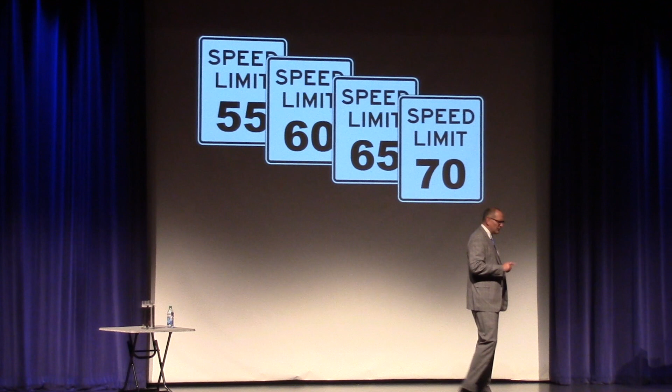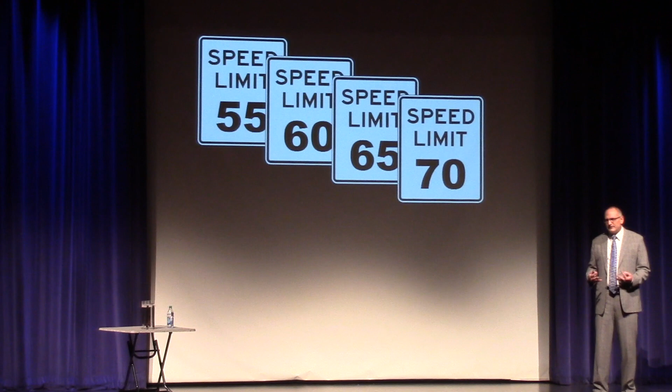Let's go back to our speed limit conversation. Speed limit's 55, or is it 60? Or is it 65? Or is it 70? Or in the Autobahn in Germany, there is no speed limit. Why? Why are these numbers those numbers in particular? Who set them, and why did they exist in the first place? It's a simple everyday example, but that premise, if you apply it throughout everything in your life, not just in engineering, and try to understand the whyness, it gives you basis to move on. So, let's get into some engineering examples and explore this notion of why.

So I'll offer this, that in the beginning, there was darkness. And God said, let there be light. And there was. And then at some point along the way, God inspired us to write something called the building code. Now the building code is littered with all kinds of regulations and rules and formulas and facts and limitations, and for good reason, right? We're trying to create safe, inhabitable places to be.

But when you start to peel back the layers of the building code and try to understand why are these things there? Where did they come from? What is their purpose and why are they there? It's very revealing. And in my career, there's been a couple of classic examples, which I'll share with you today, that aren't written in stone. They weren't passed down from the mountain by Moses.

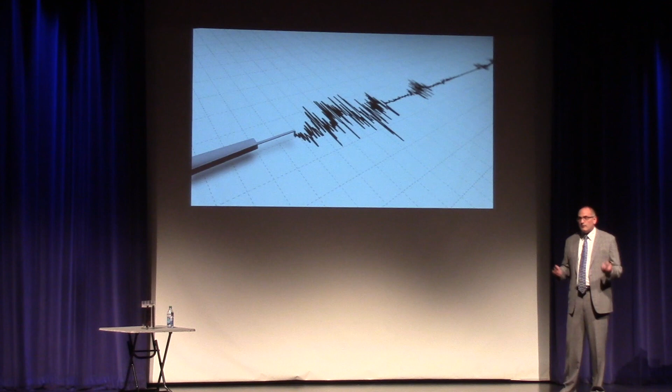What is its purpose? Before we talk about R, we have to think about what came before R. And before R, there was something called R sub W. And before R sub W, there was something called K. Where did all this come from? All right, so we got to go back in time. And back in time takes us to the 1940s and 1950s on the west coast of the United States, where our forefathers were starting to build the framework to do seismic engineering of buildings.

And so the framework and the philosophies embedded in the code today for seismic design started in the 1940s, or really got traction in the 1950s. That's where it started. This starts to help us understand what it is and why it is. What was happening in the 1950s? Of course, we didn't have computers to do calculations. We did calculations by hand. Well, we didn't, but our forefathers did. Hand calculations to describe and understand a very

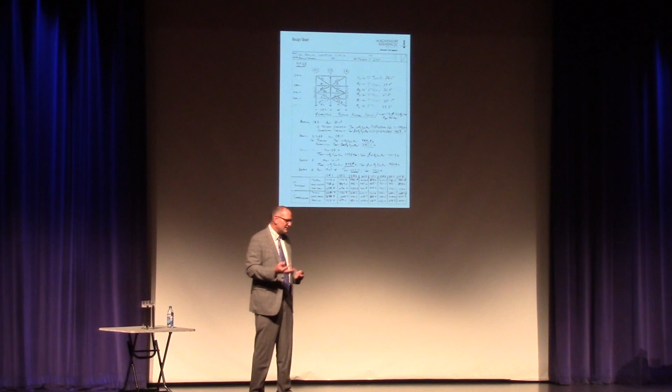challenging structural response. That is the idea of when an earthquake comes and hits a building and excites a building, the philosophy, the expectation is that the building will respond to that earthquake and concrete will crack, rebar will yield, steel will yield, and in doing so absorb that energy. It will respond non-linearly to that ground shaking. But in the 1940s and 1950s, there was no way to do those calculations in a practical sense.

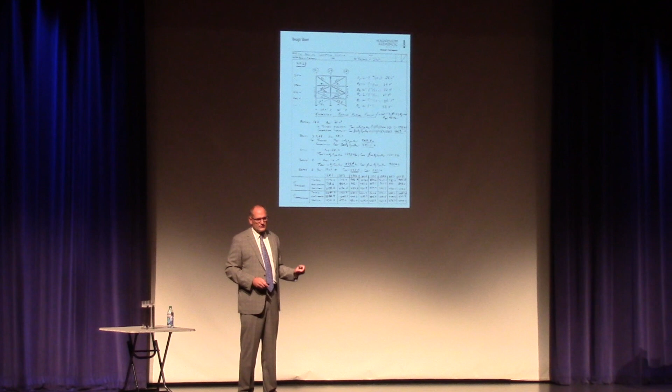So, what our forefathers dreamed up was, if we reduce that earthquake to a lower value, something that brings the demands down into the linear elastic range, so that we can actually do a calculation and come up with how much steel, how much concrete, how much rebar to put in the building, we have a chance. And then if we detail those connections and pieces properly and add ductility to them, they'll take up that gap,

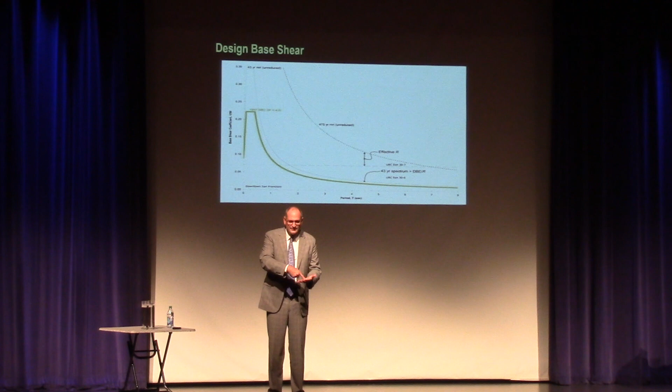But today, many engineers look in the building code and they think it came down the mountain from Moses and R equals 8. My God. All right, R equals 8. So what we've done, we've taken our earthquake and we've divided it by 8. 12% of the actual load that may exist when an earthquake comes. And we look at this and say, well, that applies to ductile systems. Things that will respond very ductilely, like moment frames, buckling restrained braces, things that will absorb a lot of energy. And so the code assigns this magical number 8.

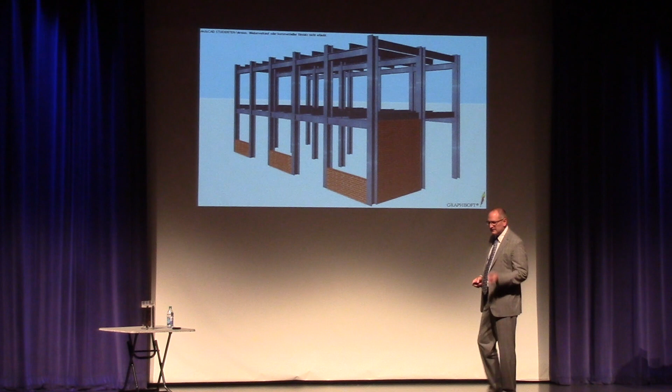What was being built at the time, from the 20s to the 50s, were a lot of masonry bearing wall buildings, and some buildings, as they were getting taller, included a steel frame. After earthquakes and earthquake reconnaissance, there was anecdotal evidence that buildings that included this steel frame did better than bearing wall buildings. Thus the requirement: anything taller than 13 stories must have one of these frames in it. Not based on science or math per se, but on field observation of earthquake damage. That seems rational at the time, nothing inappropriate.

But then we find out this in the 1961 code, and now we're into the Uniform Building Code. So now this has gone national, beyond the city of Los Angeles. Structural frame, buildings more than 13 stories or 160 feet. Well, wait a minute. Where did the 160 come from? I thought it was 150. It's a typo.

True story. So, the limitation of 160 feet for a reinforced concrete shear wall in the building code today is based on a shadow study and a typo. That's why it's there, not based on math or science. So today, when we're designing these very tall buildings, 1,000 feet or more, in places like San Francisco or Los Angeles, reflecting on the why of R and the why of 160 gives us two things. One is it gives us confidence to go a different way. We shouldn't be beholden to these rules that don't have any relevance to what we're trying to do anyways.

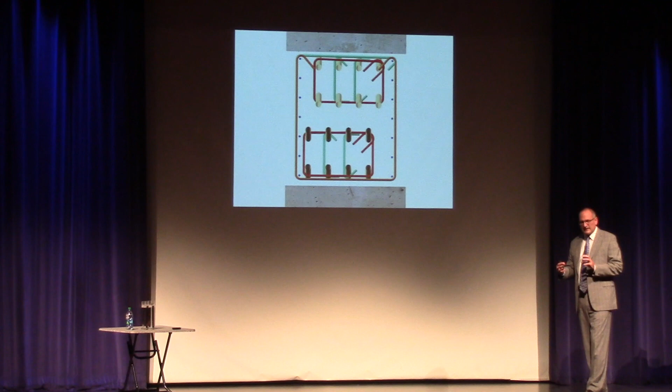Very heavily reinforced. The contractors complained there's these little micro cages that were required by the building code. Very, very difficult to put together, very time consuming. Cost a lot of time on the job site to try and stuff all this stuff together. So the question, why not? Why not do it differently? How might we do it differently?

Well, the idea was simple. Let's get rid of those little micro cages. Those are the things that are causing the problems and giving us alignment problems with the rebar. And let's just take the beam and simply enclose the beam with enough stirrups, enough ties to confine the beam and let the diagonal bars float free inside it. So it's easier for the contractor to place it, quicker for the contractor to place. This was the why not. Why not this? So what did we do?

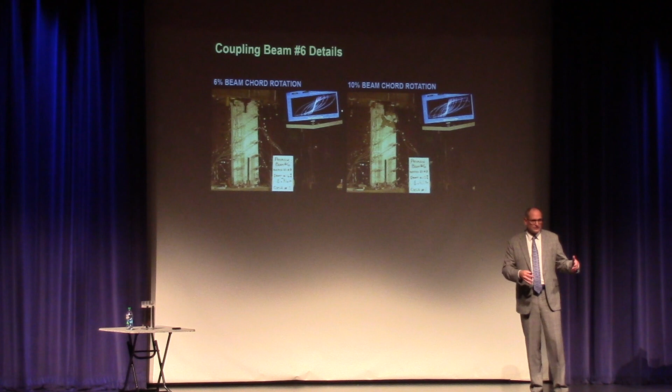The Pankow Foundation graciously funded a research project at UCLA. We worked with Professor John Wallace, and we built a whole bunch of beams, and we broke them, and we showed that it worked great, and within 6 months' time, we changed the building code. And there's a new provision in the building code that allows this type of construction as an alternate. We didn't take the old thing out, we left the old thing alone. We added this as an alternate, and today, most of these beams get constructed and detailed like this because the contractors like it because they can do it faster.

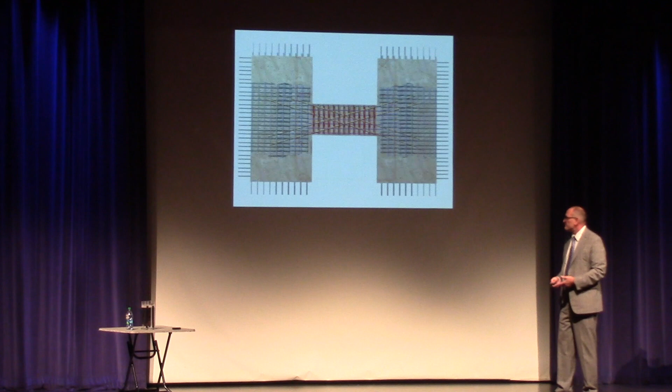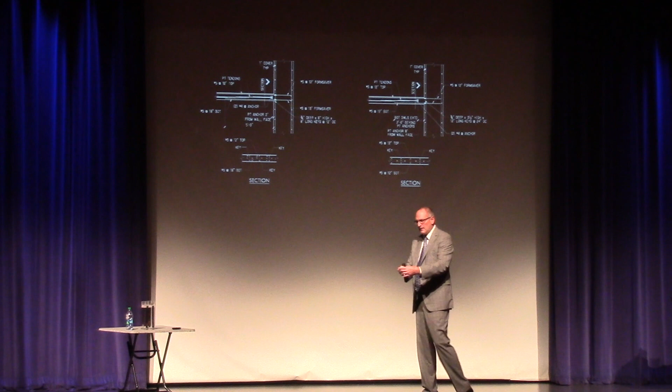All right, that's a simple example, maybe a little pedestrian, a little mundane. Let's take on another interesting question. So a lot of these tall buildings that we design, there's concrete walls in them, many times around the core where the elevators are. And many times the floor slabs for these buildings are post-tension concrete. And the way in which contractors like to go about building these buildings, many times will advance the core of the building ahead of the construction of the floor slab.

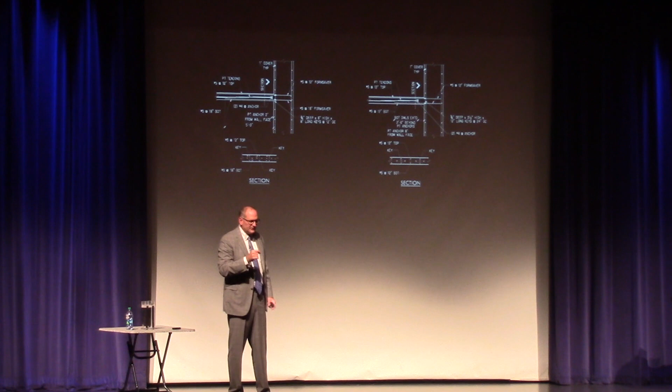Calls into question, how do you connect those two? If the core is already built in advance, 10 floors above where the floors are going in, how would you connect those? Because the traditional connection was to take, in this case, in the detail, this PT anchor, there's a PT tendon here, and a PT anchor. That PT anchor would be situated back here in the wall, and so the anchor is situated in the wall, and that's okay if you're building the building floor by floor, build the wall, build the slab, build the wall, build the slab. It becomes very inconvenient if you want the wall to go ahead.

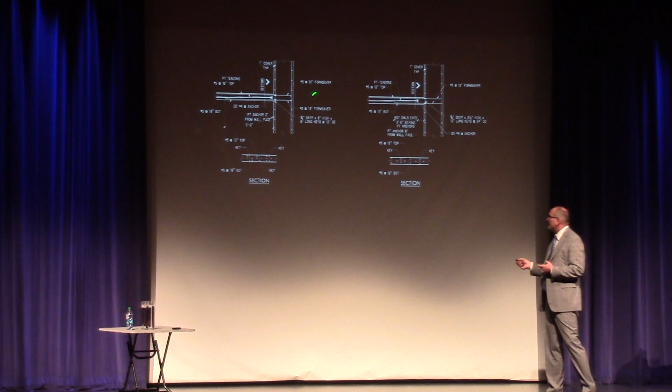How do you make that connection? And the building code didn't have any guidance for us. So the question is, why not? Why not connect this simply with rebar and leave the PT anchor be outside of the wall? And where outside of the wall might it be? So once again, research. Why not?

But what we did with this is we figured out detailing that allowed us to get the kind of behavior that we wanted, so that we ended up ultimately publishing a paper in the PTI journal that now has become the basis of practice throughout the United States for tall buildings. It's all based in that question of why not? Why are we doing it this way? Why not do it that way?

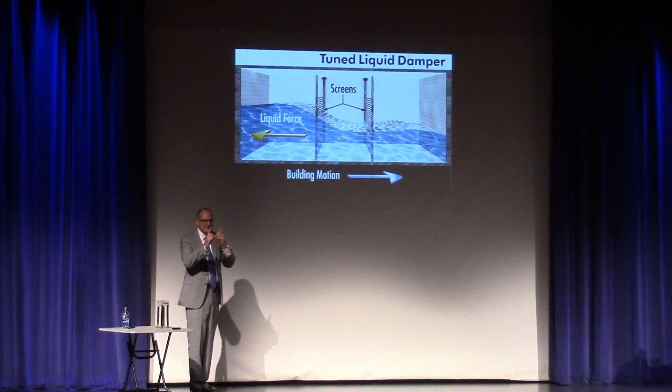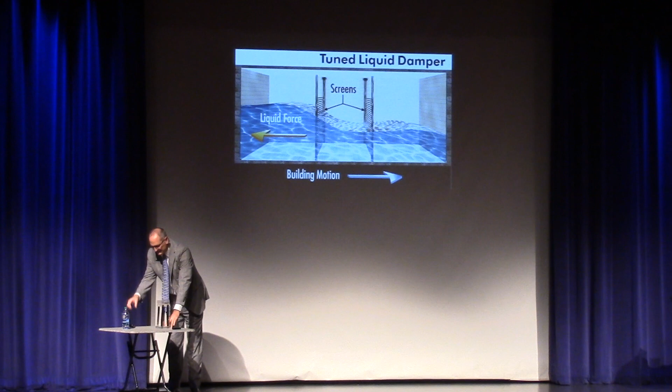And how it works here is a very simple diagram, right? Engineers in the room. There's an unbalanced hydrostatic force. More water pressure here, less water pressure there. There's an unbalanced force in the building that way. And if you can tune the waves in the tank to counteract the motion of the building, it quiets the building down. And so that's what we did. I'll show you again. It works lovely. And this in Hong Kong we built maybe 10 or 15 years ago. We've since built probably 10 or 12 more buildings with this why not scenario included.

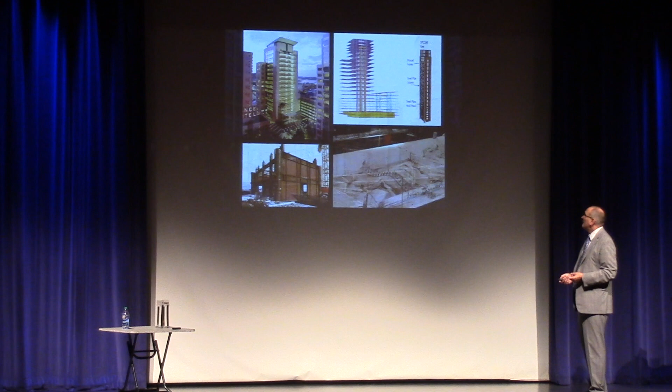Another example, we talked a lot so far in this presentation about concrete shear walls. Okay. Why not make them out of steel? Who says we've got to make a shear wall out of concrete? Why not make them out of steel like that? Oh, how does that work? How does that behave? Okay. Why not? Into the lab we go. This time in Berkeley again.

We build very large test specimens, this time actually funded by the federal government, for a project that we ultimately built in Seattle. But the notion was we didn't want in that building, for a variety of reasons, big concrete shear walls. We wanted nice thin steel plates for the core of the building. So the research connected us to the why not. We were able to use the research results to inform our design to do something that's other than a concrete shear wall. Why not make it out of steel?

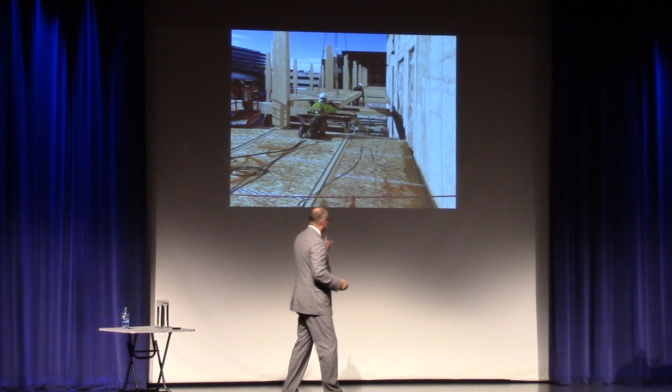A couple more examples in the why not category. Today, all the rage in the United States seems to be heavy timber construction, and in particular, high-rise buildings made of heavy timber. This is a building we recently completed in Minneapolis. It's not that tall, it's 8 stories. But it's made of heavy timber, and it's one of the first in the United States to use that technology, I guess tongue-in-cheek, right? The building method we're using here is how they built warehouses in the 1850s.

Not really new. But anyway, we built it. It's all the rage. The architects love it, the brokers love it, the tenants love it. It feels good, it looks good. It's just this hip environment to be in, this wood structure.

What we discovered in designing this building, though, was we're really limited on how far we could span, how deep the beams needed to be to get those spans, and the limitation was with the mechanical properties of the wood. In particular, the modulus of elasticity of the wood, because these designs tend to be deflection controlled, so if we had a higher modulus, we could make a better building. Why not?

This is a question we're asking right now. Why not? Why not grow a forest with trees that are intentionally grown to build buildings with that have a higher modulus? Why not? They already grow entire forests of trees to make toilet paper. It's true. You need toilet paper. It's a commodity. They grow a lot of trees. They grow very fast, very soft to get the turnover. We want the opposite in buildings. We want wood that's hard. We want wood that's stiff. It takes a long time to grow that tree.

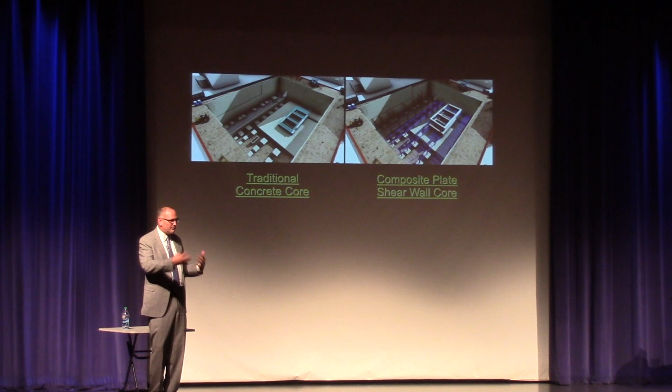So, we are. What we're doing now is we're in the lab with Professor Varma, and we're working on a scheme where you'll see a side-by-side comparison: on the left is a traditional concrete core, how we would normally build this building, and on the right is this new idea we have where the core, instead of cast-in-place concrete, is 2 steel plates interconnected by rods, empty, but erected with the steel frame in the same sequence as the steel frame. So the speed now is all about the steel erection.

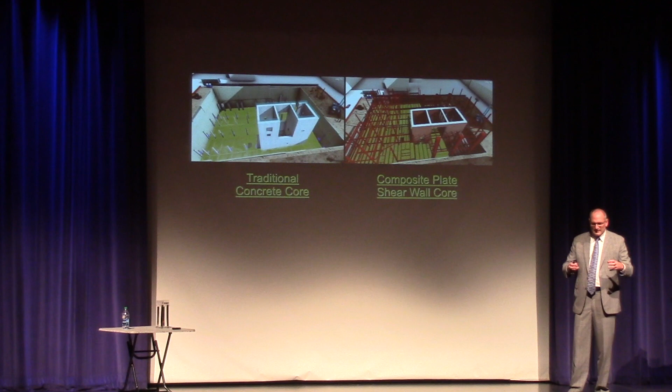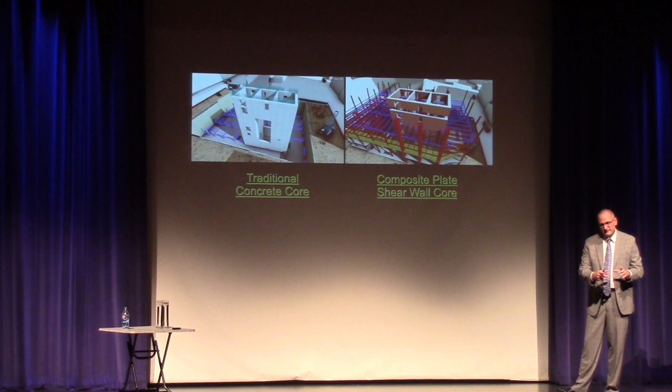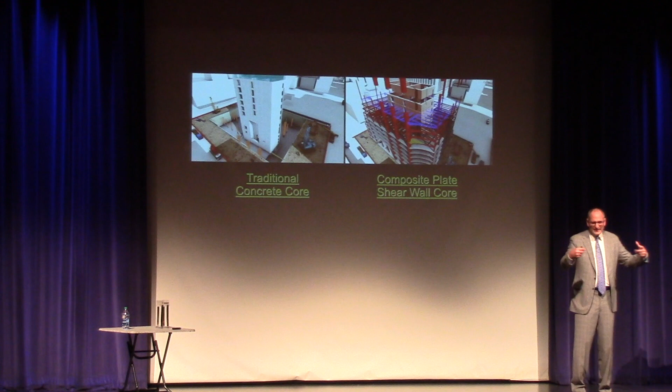And then we come back later and infill those 2 steel plates in between with concrete to give the building the stiffness it wants. It doesn't need any reinforcing steel because the steel plates are the reinforcing steel. And the whole premise of this system is grown out of research that Professor Varma and Michel Bruneau at SUNY Buffalo have been working on for a number of years. We're taking their work and extending it into high-rise construction.

This building will be another building for Amazon. I guess I wasn't supposed to say that. Anyway, there'll be a tenant in this building.

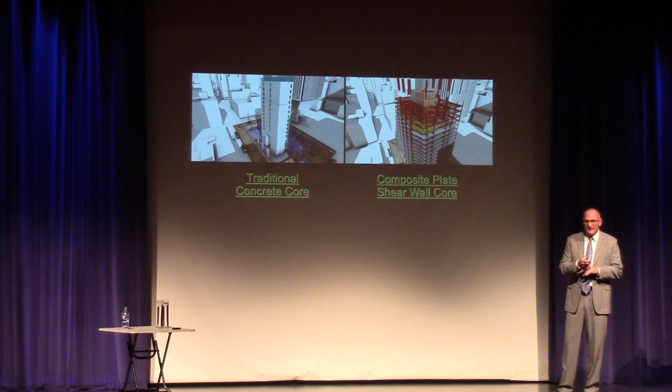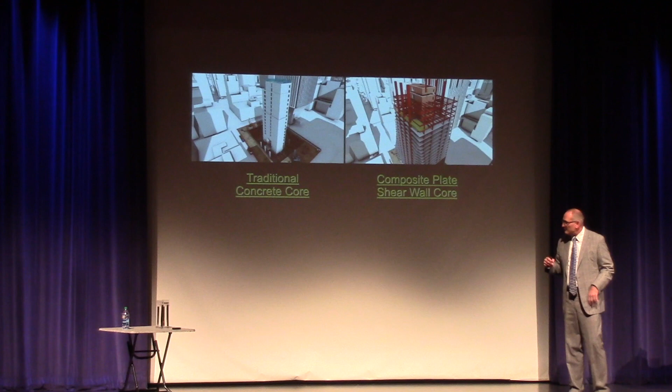And it's just starting construction now. The demolition was underway as I left Seattle. The building is 850 feet tall, so it will be the second tallest building in Seattle. It's mostly office with some residential on top. But you can see in this video already the disparity in terms of where is the building on the right versus where is the building on the left.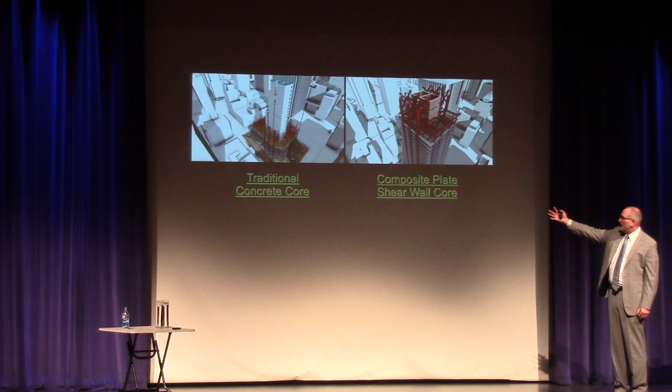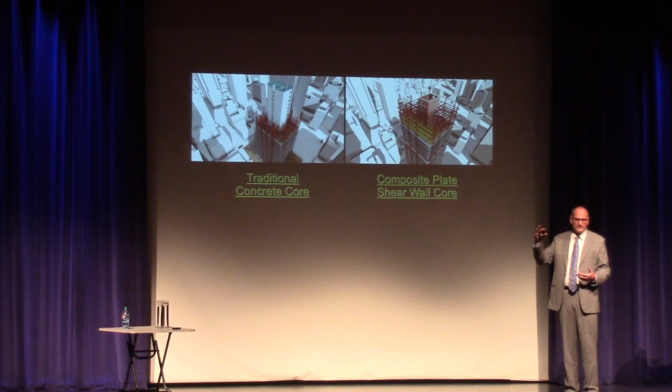When this video completes itself, you're going to see at the end of the day, we're predicting between the new way and the way we used to do it, about 120 working days difference. Not calendar days, 120 working days. It's like 5 months. And if you're a commercial office building developer and you say, I'm going to save you 5 months, that's tens of millions of dollars because of the interest carry on his loan and because he could rent the building 5 months earlier so the cash starts flowing 5 months earlier. It's literally tens of millions of dollars to be had by the developer using this new approach to building the building.

All right, so the building on the right is now done. You can't read the number, I'll read it for you. 377 working days from when we started the foundation to when we topped it out. And the building on the left is trying to catch up. This time, nearly done. Punchline here is the building on the left is 490 working days, so 120 days difference. So time will tell the tale here, right?

We're building the building. It's physically under construction. We're trying to take the design that we made for that building and improve it. We know our design is conservative, and this is what we're working on in a lab here in the Bowen lab to investigate ways to improve that design to make it go even better and make it also applicable in environments not just seismic, but wind.

So the Charles Pankow Foundation, the MKA Foundation, our own company, and Purdue University, we're all working together along with AISC to fund a project here at Purdue. It started actually 6 or 7 years ago, where we worked with Professor Kreger and Professor Bowman on this 5-story tall specimen that we had in the Bowen lab, where it was a T-shaped section of this construction. And we filled it full of concrete and we pushed on it until we broke it. That gave us a lot of confidence to go ahead and proceed with our design, which has been the basis of how we've made that design.